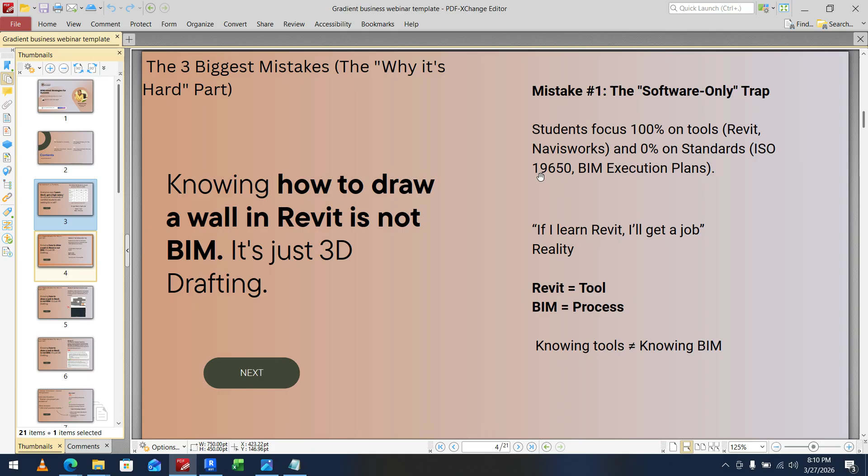So here is mistake two. While you prepare the model, you are ignoring the construction logic. So here I have two pictures, pic one and pic two. Before going to pic one, let me explain pic two.

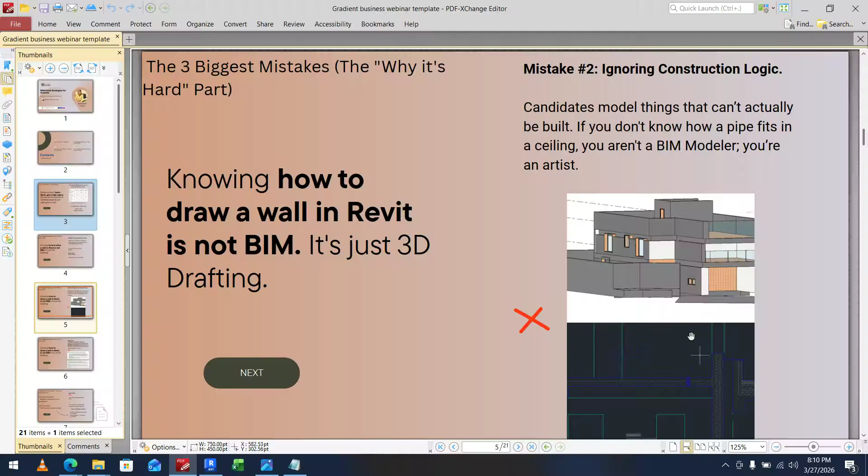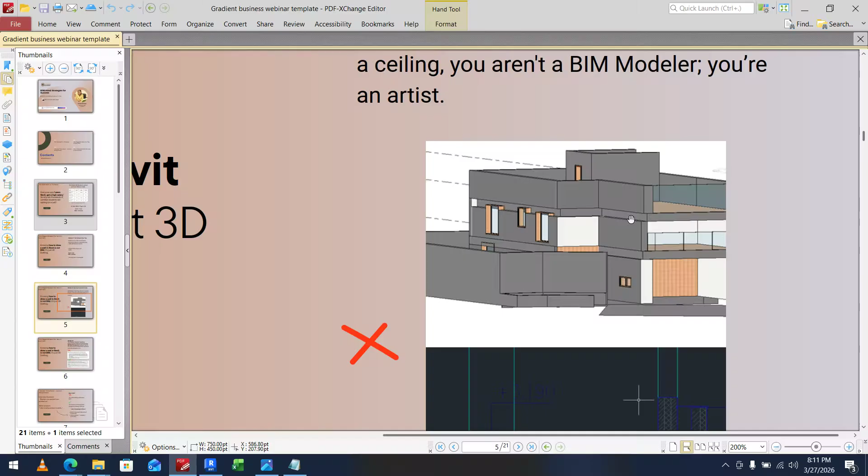You can see this is the drawing we have given in the interview. Based on the drawing, I asked someone to model the building, but here the slab thickness is mentioned as 260, but while doing the modeling they just modeled it for 500. So you should not blindly focus on modeling.

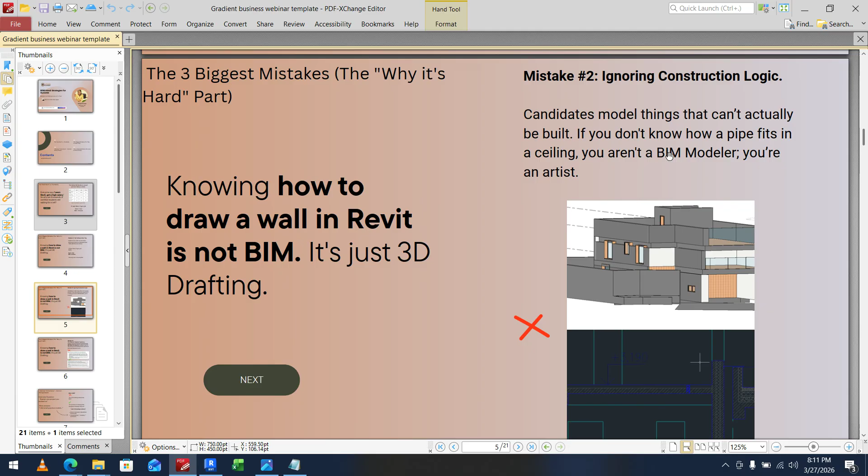While modeling, you need to understand the standards; before the standards, you need to know the design. So what I will tell you to avoid this mistake is, first when you start practicing on the Revit model, just start with a small residential building. You can just download any picture, like G+1 or G+2, or just a 2D plan, and then model it. Before modeling it, just understand what the picture says.

So what is the bedroom size, what is the bathroom size, what is the living room size, and you need to refer to the design documents also. So for a residential building, what will be the living room size? If two persons are staying, then what will be the size? If we require a large bedroom, then what will be the size?

So before getting into the modeling part, you need to know the design. If you directly go to the software without knowing the design, you only learn the software, not the design. So learn the design first. You need to start with a small residential project, first a pilot project, then just download any CAD file from the internet. There are many websites like CAD block, GrabCAD. Download the CAD files from the GrabCAD websites.

Just search for 2D plan, AutoCAD 2D plan. Just download it, link it in Revit and trace on top of it. But before that, you need to start with a small residential project by seeing the picture, and then you can plan an individual project without seeing any picture, without referring to any CAD drawing. Just design your own building, then go with some CAD file, so that you can know what standard is followed in the CAD file. So this is how you can rectify mistake 2.

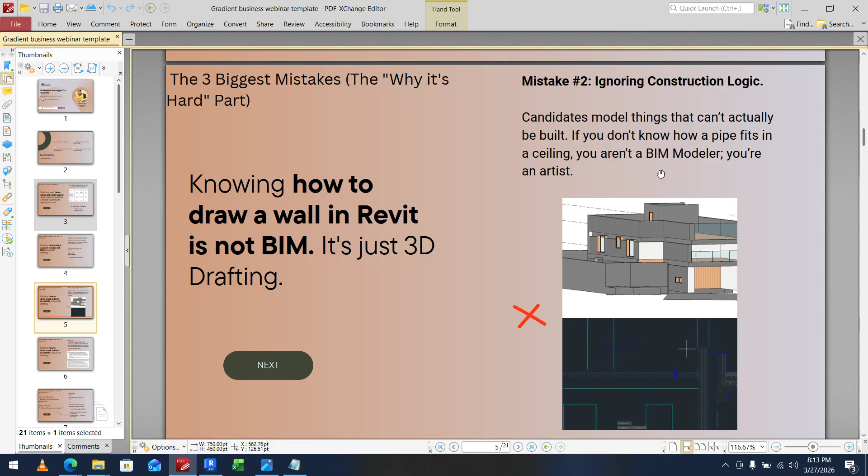And mistake 3 is the resume, not following a proper resume. I have seen in many resumes they just include LOD. Because people know LOD is used as a term in BIM, whether they know LOD or not, they just mention LOD as a common term in the resume. LOD, Revit, and then Navisworks, AutoCAD. So they just mention the software only in the resume.

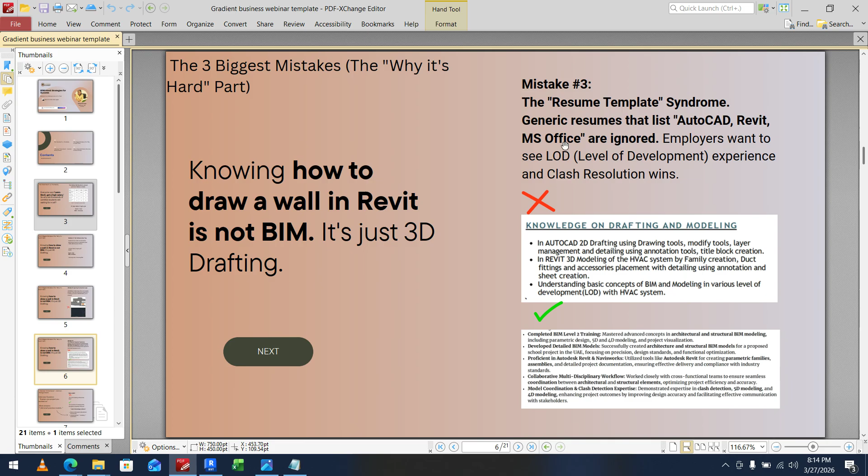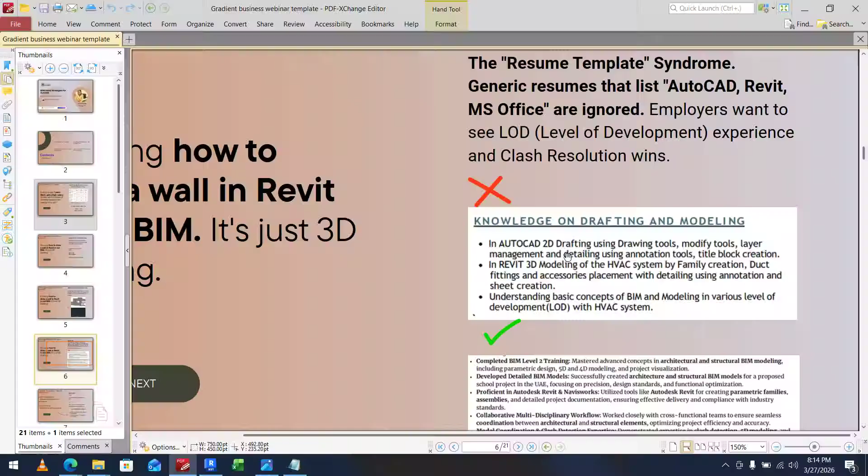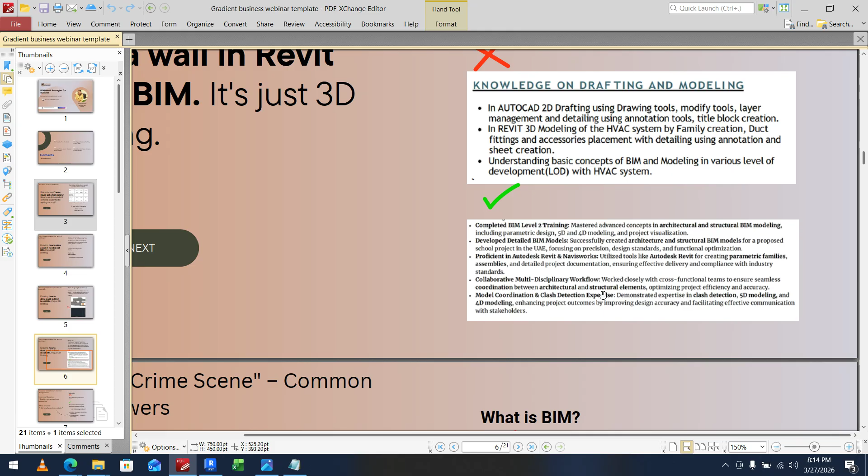So how do you rectify it? By explaining the process behind it. If you can see in the first one, AutoCAD 2D drafting, Revit 3D modeling, sheet creation, understanding the LOD. This is not enough. If you can see here, developing detailed BIM models, successfully created architecture and structural models for some project, what tools were used for creating the families, and for documentation and project coordination, how they collaborated, how they coordinated the BIM models. So they need to know all the processes in BIM.

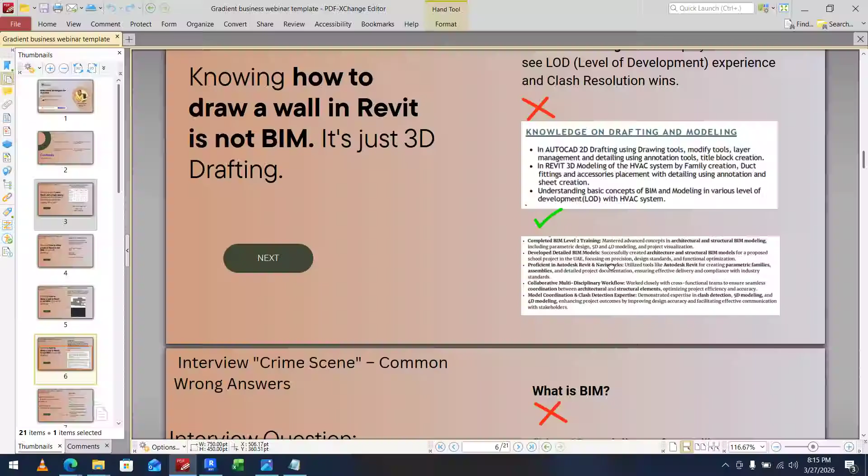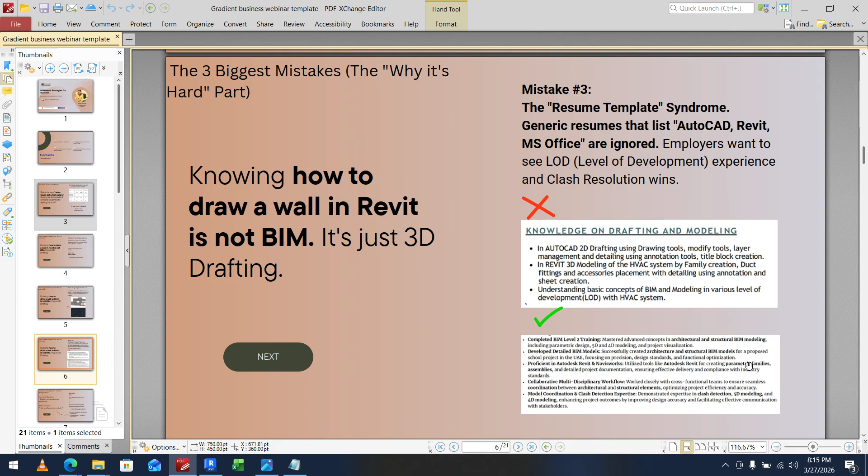In the BIM process, we have a coordination process, a collaborative process, 4D simulation, 5D quantification; everything we have to include in the resume. Because if you are applying for a BIM job, they need to know whether you are aware of the process behind it. So your resume should state all the processes behind BIM. The first resume does not meet the standards, whereas the second resume template meets the standards. Here they highlighted the important things. You have to highlight the key points. So this is how you rectify mistake 3.

Okay. Now we'll get into the common wrong answers we give in interviews. If someone asks you to explain a project that you have worked on, many people say, I did small projects, and just present some 3D rendered pictures of it. Actually, the main scope of BIM is to show the coordination, how well you have coordinated the BIM models. The second is how well you have found the constructability issues in the building, and how well you are able to do the quantification, BOQ and BOM, bill of materials. These are the things companies need. They don't need your rendered BIM models.

So if someone asks you to explain the project, you need to explain what project you have worked on, how you started, and what the level of development of the project is. Just download a pilot project, download any CAD files, and start with level of development LOD 200. Before getting started with LOD 100, LOD 200, you need to know what LOD 200 is. Okay, I will explain in the next slide how to know that.

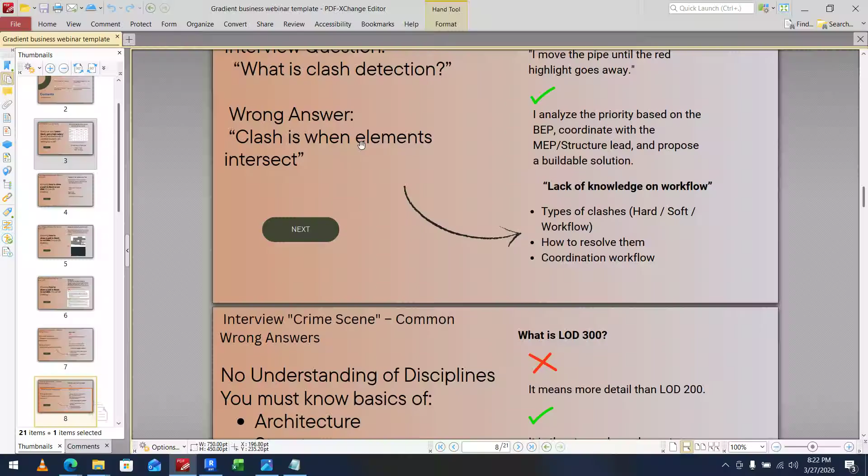This is one of the common things, because we ask what is LOD 400, 500, 300 and all. They just give the titles, because on the internet we have titles like LOD 100 concept planning, 200 schematic planning, 300 design development, 400 fabrication, 500 as-built. They complete it in a single sentence, that's all. But the real thing is you need to know what LOD 300 is. How do you know that? You have to learn the BIMForum document. I suggest you go through this BIMForum document.

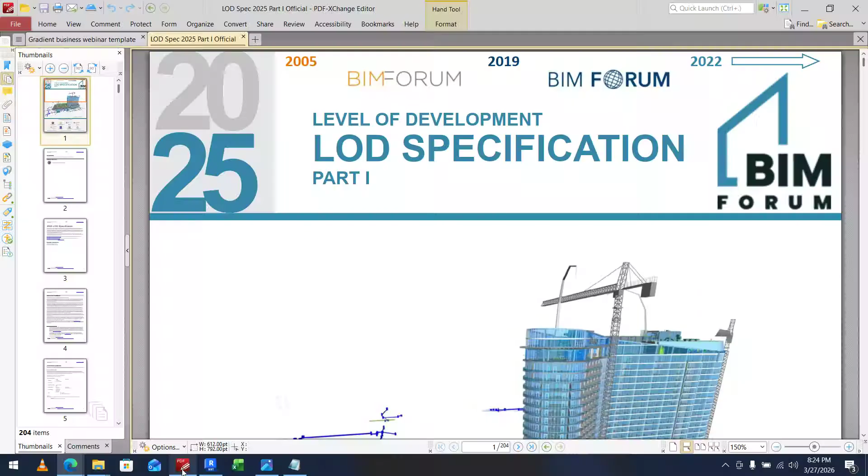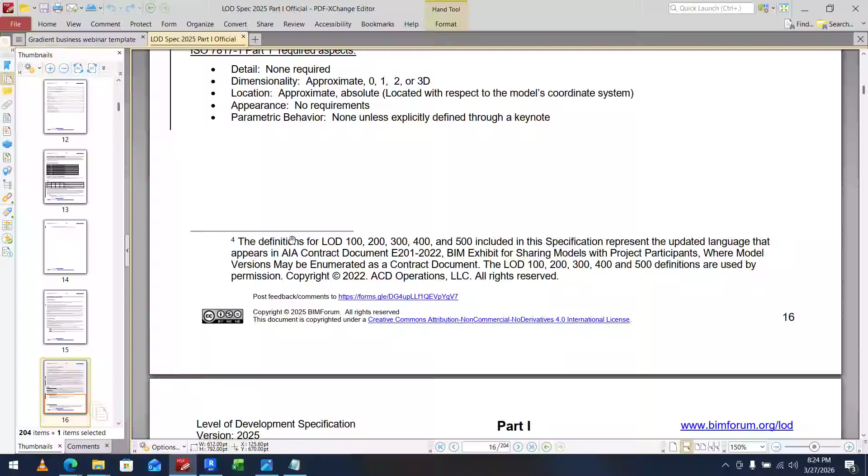If you have started learning BIM, first understand the BEP. Download a BEP document from the internet and learn it. Then understand this BIMForum. The BIMForum has the definition for LOD. This is the standard you have to follow for LOD, and you have to follow this document for the LOD definition. So here in the LOD definition, we have once again.

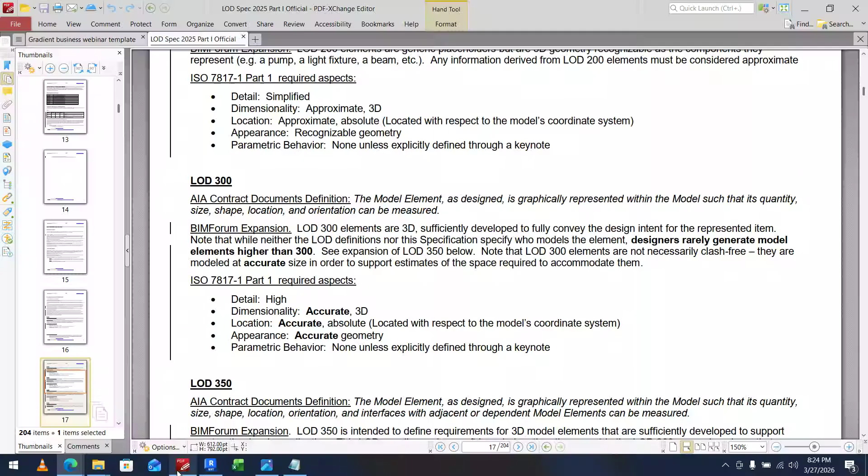So here in the LOD definition, we have a definition for LOD 300: the model element as designed is graphically represented within the model such that its quantity, size, shape, location and orientation are measured. So the correct answer for LOD 300 is to say the LOD 200 model is an approximate model, whereas 300 is the design development model, where all the information in the BIM model is

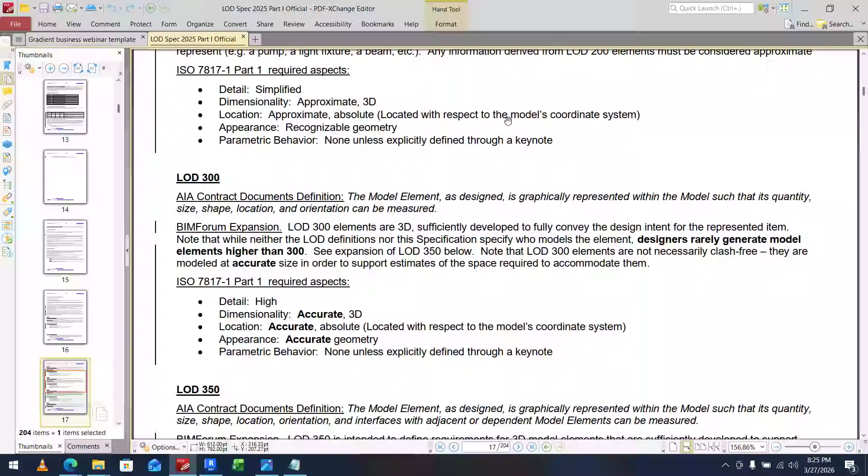accurate, whereas in LOD 200 the information like size, shape, location is not accurate, it is approximate data only. But when we go for LOD 300, all the data mentioned in the LOD 300 model is accurate. So that is how you have to explain. To explain it, you have to know this BIMForum standard. So you can go through this document well, so that you can understand what is LOD.

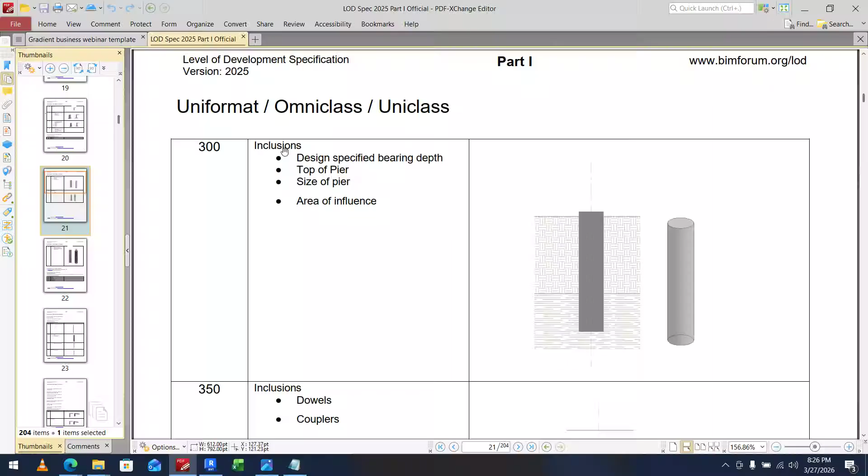So in LOD 100, how you have to model, you have to see this class. In LOD 200, how you have to model, you have to see this class. For LOD 300, what you have to include in the model, they have mentioned here. Like that, for each and every element, they have mentioned it in this document. You need to refer to this before going to interviews or before doing the modeling. Okay. So to correct this mistake, we have to understand the standard.

Now, how well you can learn. So we have seen the mistakes. Now we will get to know what are the important things we need in BIM to get a BIM job. First, you need to have technical knowledge. Technical knowledge is not only about learning software. You need to have technical design knowledge as well as software knowledge. And here, some of the companies expect you to model fast.

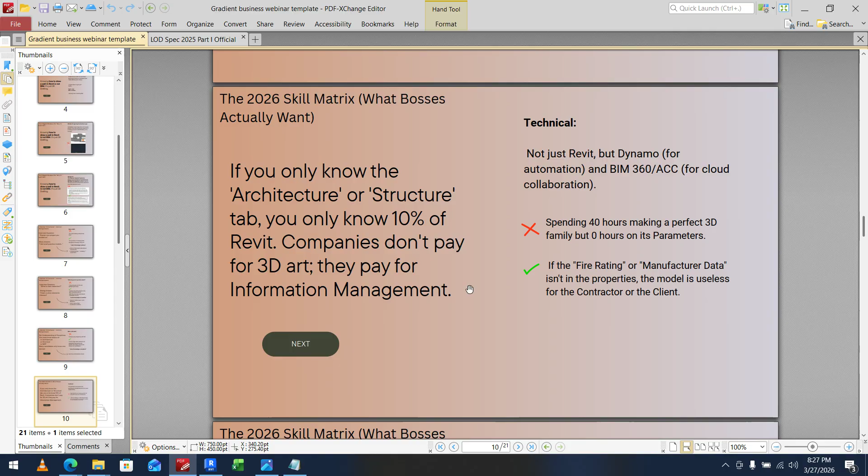So you have to follow some visual programming tools like Dynamo for automation, and many companies right now are following cloud collaboration only. Before COVID, we used to do server collaboration, but nowadays more companies are following cloud collaboration only. So you need to be aware of BIM 360 and Autodesk Construction Cloud also. So that is how you can upgrade your technical knowledge, not just focusing on the software. You have to focus on design, then software, then how to model fast in software using tools like Dynamo and cloud collaboration also.

And then apart from the software, how the workflow will be, how your model will be used in real time, how you have to include the information. So apart from Revit, you need to know interoperability. Suppose you did a model and you need to share it with someone who doesn't have Revit, but they want to open your BIM model, so you have to know the interoperability process and the open BIM standard process. Not only Revit alone will help you; in Revit also you need to know in detail.

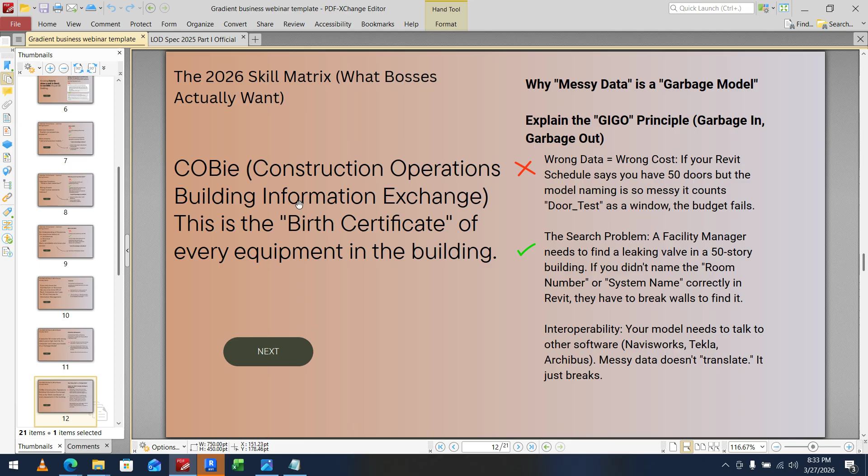So you need to know what is the process after construction, how your model will be used after construction, and what data we have to feed. This is called COBie data. This COBie data we give for the facility maintenance phase. So you need to understand how you have to feed the COBie data in the BIM model. So it's not just knowing the software, you need to learn this also.

And you can just have this last part: using AI tools to make your process easier. So not just jumping into the AI tool first, that is not a proper way. If you don't understand the design, if you don't understand the process, skipping to AI will not help you get a job. Even if it helps you get a job, it won't be a long-sustained thing. So in order to go for AI, before that you need to know well about the design, technical workflow, then standard, then finally AI.

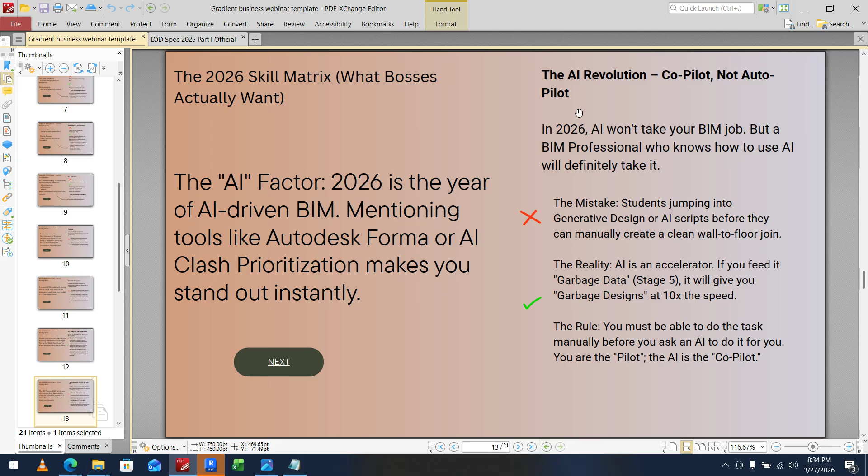You can use the AI tool to speed up your modeling process. For that only you can use AI tool.

So here I will tell you the four rectification plan, how to resolve this. Stop learning software, start solving problems. First, as I said, you have to start with a small project. Small project means, let me show you.

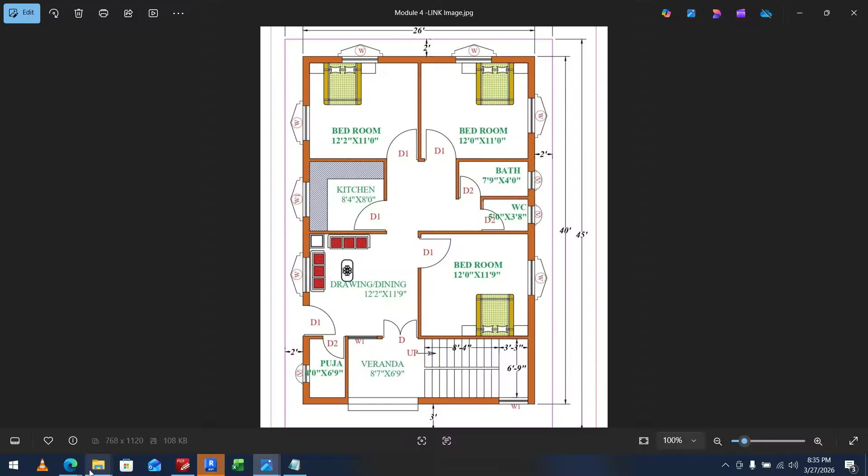Initially you can start with a small project like this, and even before modeling this you need to understand the facilities we give in a residential building, like bedroom, bedroom size, kitchen size, bathroom size, living room size. You have to understand this, then only you can come for this. First start with this kind of modeling, then download some CAD files from the internet.

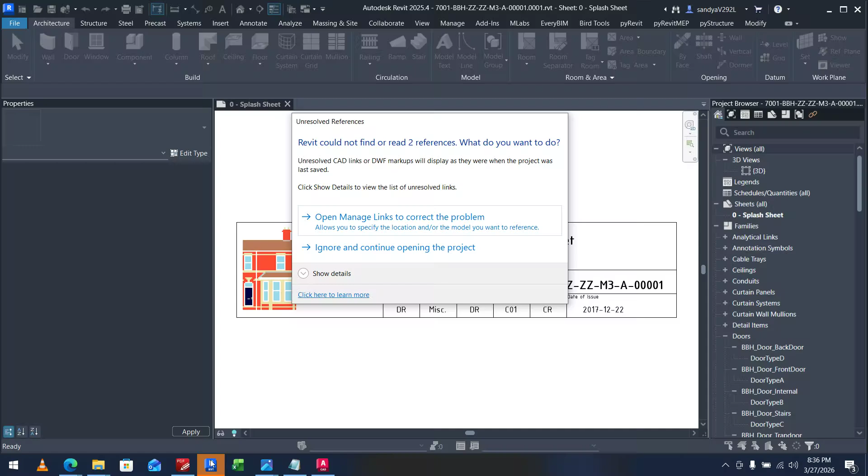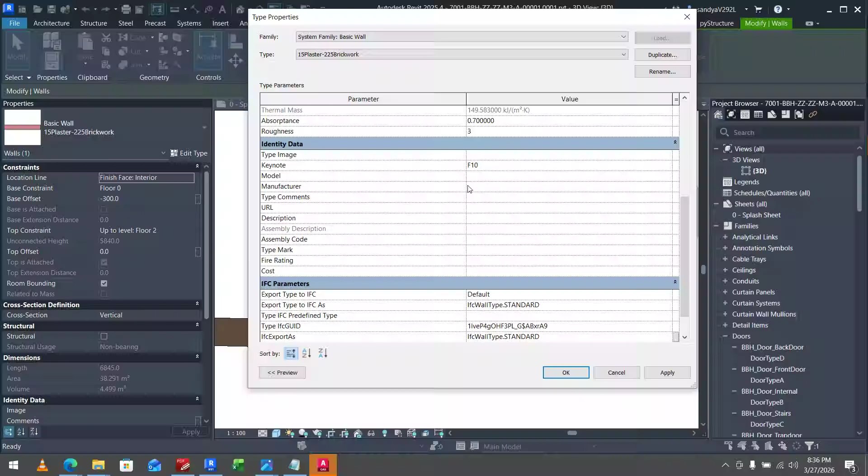Okay, let us open. So here I've selected a wall. You should not only focus on this tab. Apart from this, you need to understand this IFC data, feeding the identity data about the model. So your modeling does not stop just creating a wall. It stops only if all the information is properly fed in Revit.

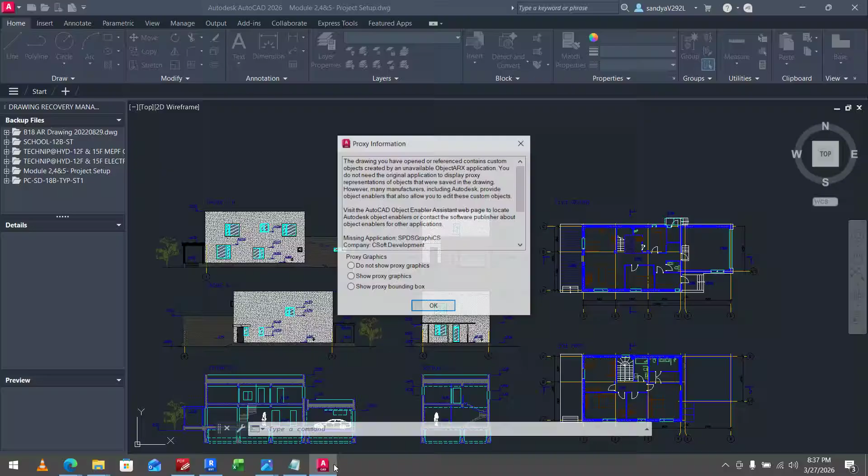So the second project, you can take some CAD file. You can download some CAD files from the internet, and understand the levels and understand the amenities provided in the CAD. Then you can start modeling. So that is the first.

And the third project should be a very big project than the first and second one. So you need to model at least four projects in your Revit learning journey or BIM learning journey. First you start with a small project, then go for the small-medium one, then focus on some commercial building, and then focus on some very large project like a shopping complex or hospital. You can do the entire process, right from the BEP to the COBie data. You can give all the details, take a screenshot of all the details, and when preparing the portfolio, you can include that.

So a student says, I know how to use pipe tool and beam tool. That does not help you get a BIM job. A real BIM engineer should say, I have identified the 200 fire protection pipe was hitting the main structure beam, and how I rerouted and rectified it. That is how you have to explain. So you have to model it, find out the coordination issues in your model, and how you have rectified it.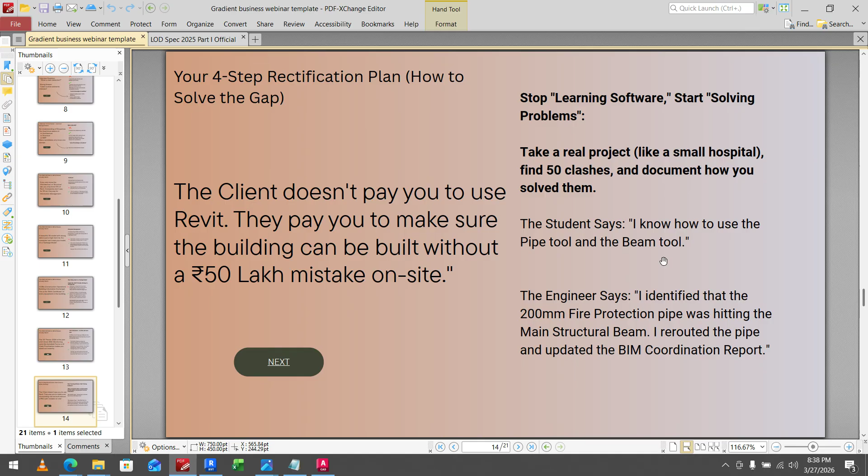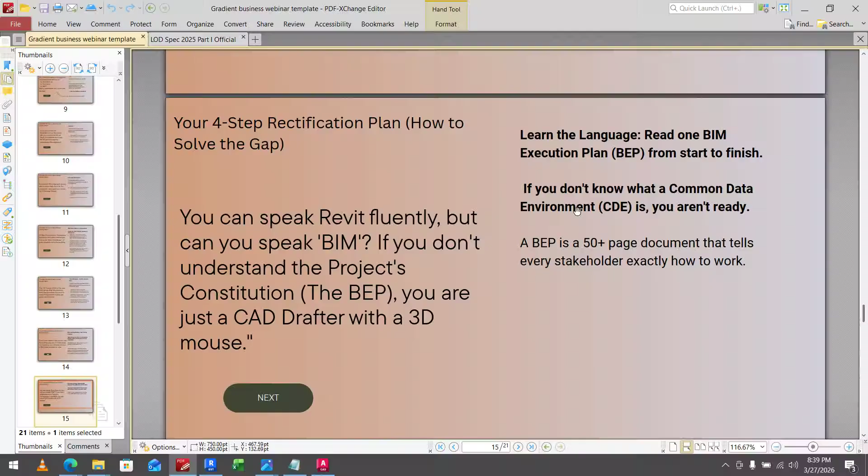The second rectification plan is reading the execution plan from start to finish. If you don't know about the common data environment, you need to learn what is the common data environment and how you have to implement it in your project. You can download any BEP document from the internet, just go through it. In that, we have a common data definition also. You can get to learn this.

So apart from the BEP and LOD, you need to know other terms used in BIM, like exchange information requirements, LOD, task information delivery plan, and master information delivery plan. These are the common terms we use in daily scenario, in daily life in BIM. So we should not only focus on BIM models, we need to know the language behind BIM also.

EIR, Exchange Information Requirement, is the information which we require for preparing the BEP document. LOD means level of development, how the BIM model will be measured. TIDP is a task information delivery plan. It shows what is the task of the architect, what is the task of the structural engineer, and what is the task of the MEP, and what they will be doing and when they will be submitting it.

So the mistake students make is starting modeling before reading the BEP. The student should not start modeling before understanding what the BEP says and what it demands, and then model it. In the BEP itself, we have the software version, what software version we have to model in, what are the delivery points and deliverables, and what coordination we have to follow. Everything will be denoted in the BEP. So to start with the BIM model, you need to understand the BEP first.

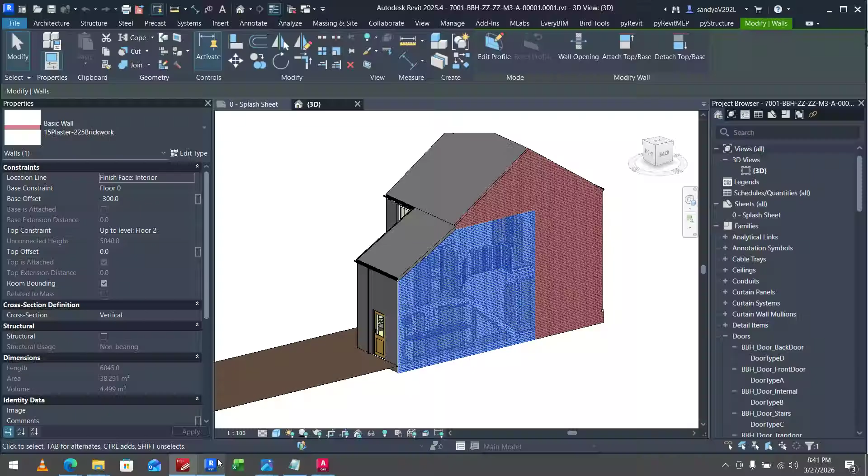So for preparing the portfolio, you should not only include the screenshots of the renders, you have to include the coordination pictures, clash pictures, material takeoff pictures, and how you have included the information in identity data. These are the information you have to include in the portfolio, not just the rendered pictures.

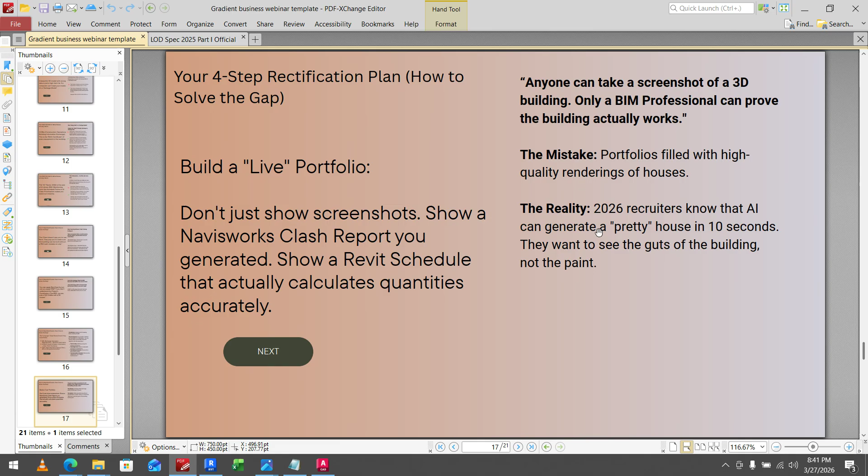And then the last one is how to show your document. You have to present it in a PDF, or you can just present it in a video manner also. So your portfolio can be a PDF or it can be a video. Just a single slide is enough, but it should state everything, every process behind BIM.

Okay, so about the portfolio, when you want to impress someone or get a job, some people are good at communication and can explain it, but some people will not be able to communicate well, so they can present it as a portfolio, as a video, or just as a PDF. But for getting a job in the BIM market, communication is very essential. What I would say is, if you are not good at communication, then you can present a live PDF or video of what you have done throughout the training.

And then finally you have to show the material takeoff also, how well the material takeoff correlates with the real time scenario. So you can just take some live sample, live BOQ, then do an Excel calculation, then do a Revit calculation, and just match both of them for accuracy. Then you can get to know whether your quantity takeoff in Revit is correct or not, because without knowing what is correct, you cannot learn something.

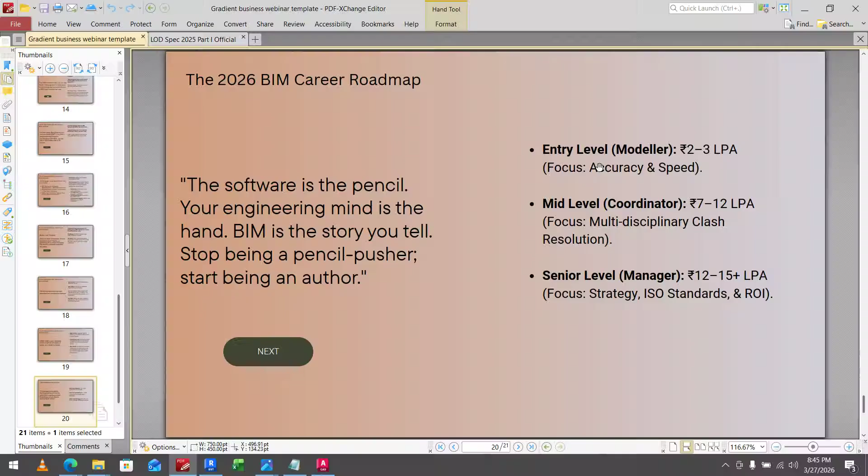So here the focus will be multidisciplinary clash resolution. The focus is accuracy and speed, how accurately you have modeled it, how speedily you will model it. Based on that only it will be fixed. And then finally, BIM manager. As a BIM manager, you need to know about the strategy, standards, and return on investment. Then you can expect around 12 to 15 LPA. So this is as per the data from the current market. By focusing on all these things, without having this, you cannot expect this.

So finally, here is the slide. If you want to learn BIM in a proper way, we train based on the courses we have. We have a course for infrastructure, a course for building, and a course for entry level also. So we don't pressurize or ask you to learn all the software. You can learn BIM first, learn the process first, then get into the software, then get into the COBie data, then get into the construction cloud. That is how we have made the pattern for all the courses we have.

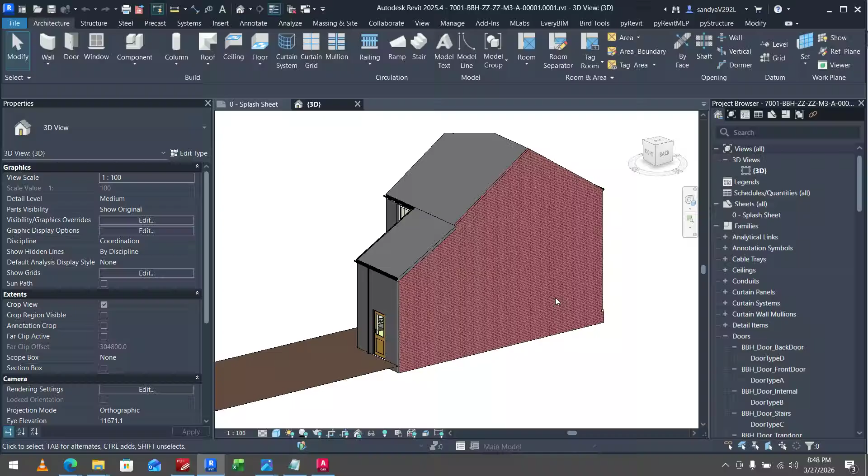COBie means Construction Operations Building Information Exchange. We use the tool called interoperability tools, BIM interoperability tools in Revit. Say for example, just take a door. Okay, or take a cooking range.

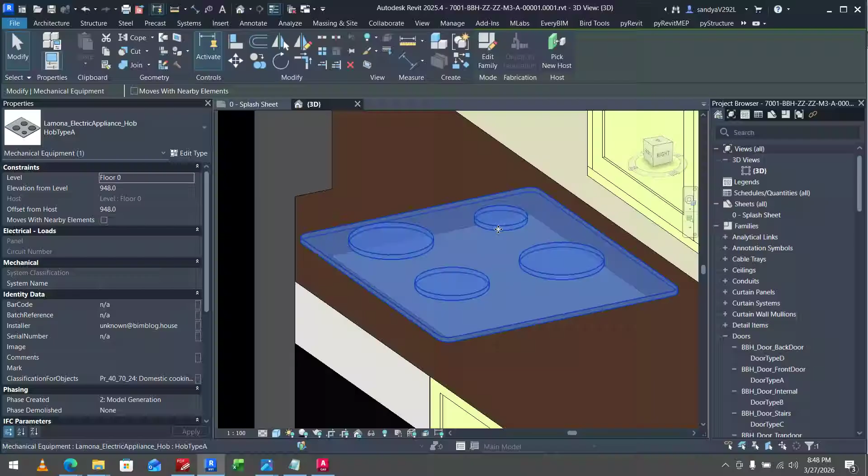This is one of the equipment. For this equipment, we have some installation date, we have information of the supplier, we have the information of the barcode and everything. In the BIM model, we have to include all the data about the product - what is the date of installation, who installed it, when the service period is finishing, and what is the barcode. Everything we feed in the model.

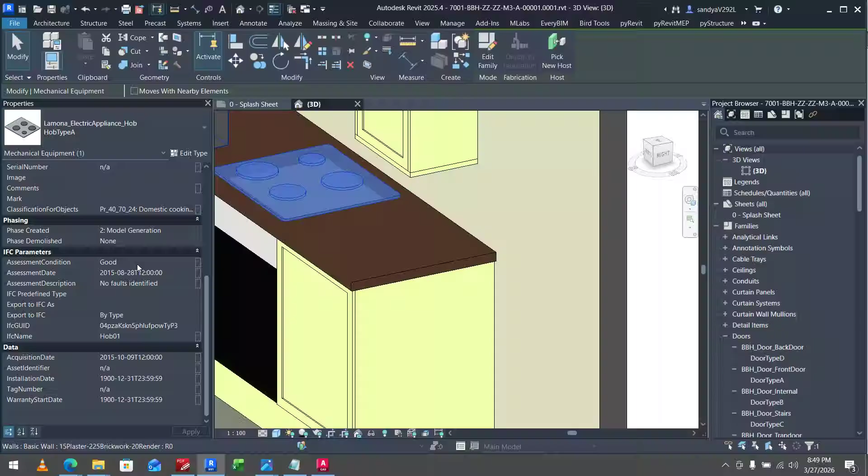But for feeding the data in the model, we don't have the parameters. This COBie will help you get the parameters for feeding the data, because in native Revit, we don't have parameters such as installation date, warranty period, or barcode. So we don't have such parameters. This COBie extension will help you get those COBie parameters. Once you get the parameters, it will be displayed. You can feed all the data for the equipment in the COBie data, and extract that as a spreadsheet, and give it to the facility maintenance team.

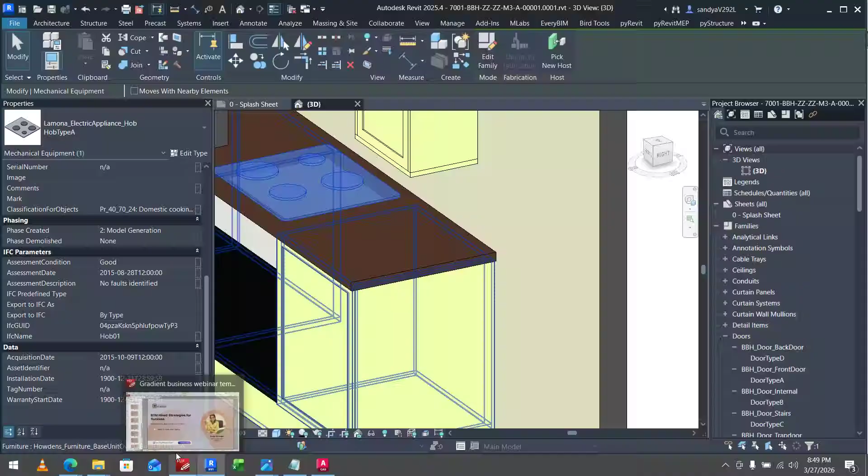In Chennai, yes, in the Chennai BIM market, the scope is less, as you said, because many people have not started BIM implementation yet. Many of the architects here are still focusing on AutoCAD. Well-known architects, they are still following AutoCAD. They are not getting into BIM implementation. Why? Because they are hesitating.

But major projects like Metro and companies like DLF, they started to implement BIM. Only the companies who are MNCs are doing BIM, not small firms, because they are hesitating to implement BIM due to the software cost. That is one of the main reasons they hesitate, because the implementation cost is heavy. Compared to AutoCAD, for BIM implementation we have to purchase the software, which is very costly. We have to purchase the CDE environment, which is costly. That is why people are hesitating.

But major projects like Metro have started, and this implementation will be big in another 2-3 years, because CPWD has mandated BIM. Central government projects should follow BIM, even if it is a small project, we have to implement it. So whoever is doing CPWD jobs, the architects are doing BIM because they don't have any other way - it's mandatory, so they have to implement it. Maybe you can expect the market to expand in another 2-3 years.